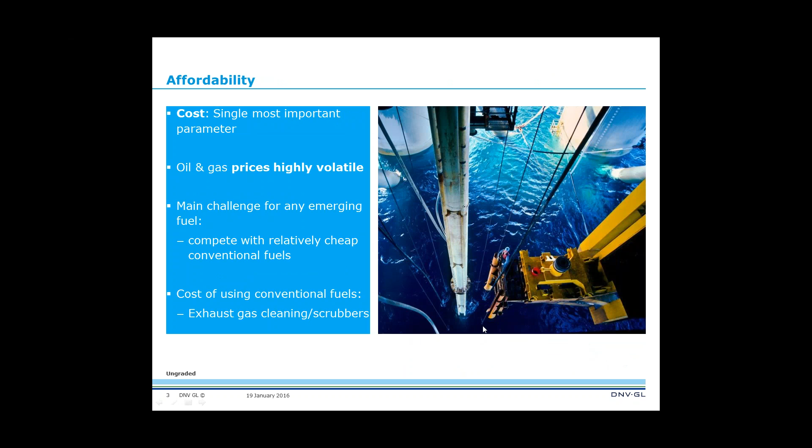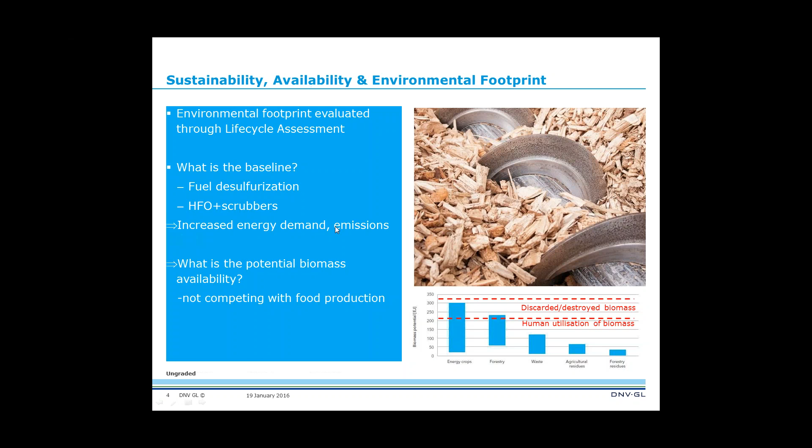We have an unwanted event, an event you want to avoid, and you have threats that could lead to that event. We need to develop barrier functions so that this event does not happen. And on the other side, if that happens, we need to develop barrier functions to make sure we avoid the consequences.

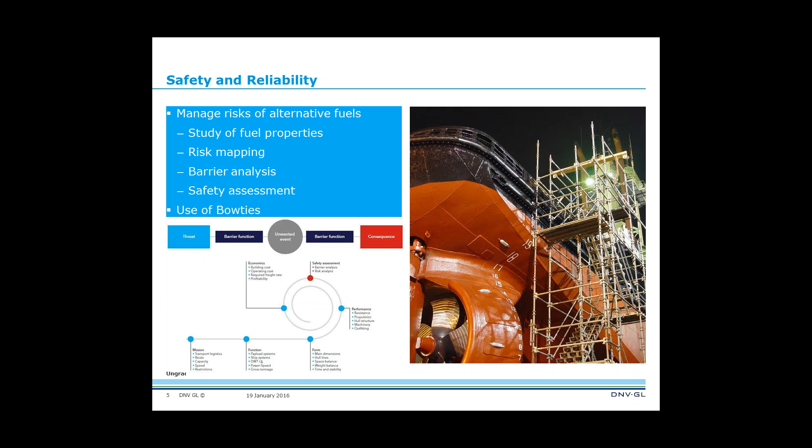So now I'm going to very quickly talk to you about some case studies.

In this publication we looked at LNG, shore-based electricity, a number of biofuels—not the most common ones, we just used methanol and pyrolysis oil as examples—and we looked at hydrogen. Because we have very short time, I will just talk about LNG and shore-based electricity, and give you some general comments on the rest.

LNG is a fuel that has started developing quite well lately. We had the right conditions for that: it began in Norway with cost incentives through the Norwegian NOx fund, and it was also a very good technical solution for addressing NOx and SOx restrictions in emission control areas. We also had the fact that in North America we had very cheap gas due to shale gas technology. So it's a combination of factors that helped LNG reach a stage where it can grow now.

There are still some issues related especially to the greenhouse gas, or global warming potential, of the fuel. We could have some methane leakage during production, but also from the engines, and this is something we need to understand well and address.

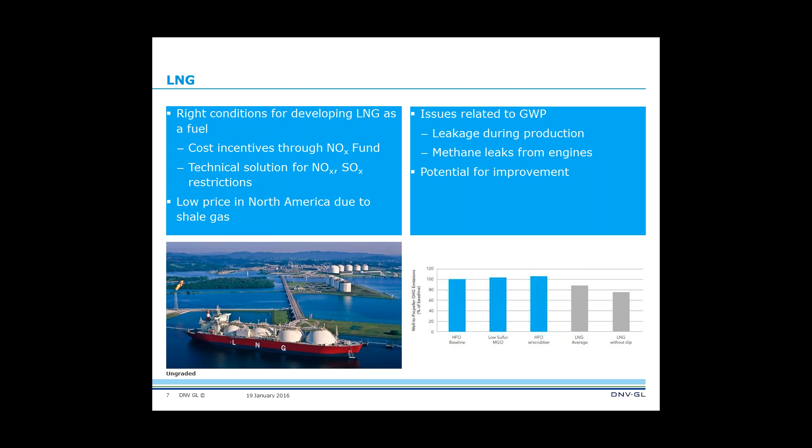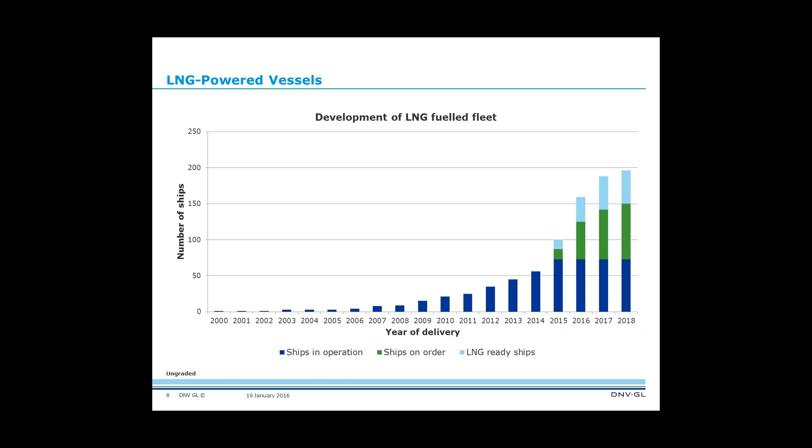And of course SOx emissions go to zero, and NOx can also be reduced quite a bit depending on engine technology. I want to show you a graph showing the development of the LNG fleet. These are confirmed orders, so you can see significant growth in the last few years, and we think this is going to continue.

I want to say a few words about electricity, because we're going to see it as a form of propulsion for some ships, for some small ships. In Norway we have a small ferry running on batteries now, but we're also going to see cold ironing used in ports more and more.

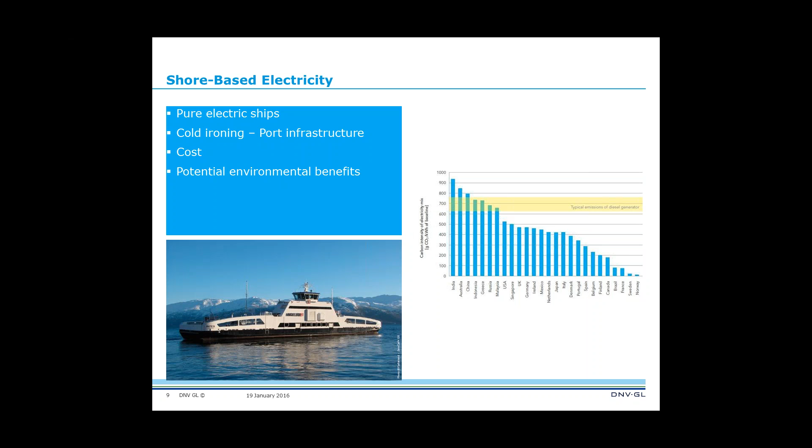Of course, you can think about the emissions for producing electricity in different countries—this is what the graph on the right is showing, and what the cost of that is. So we need to make sure this is an attractive option for vessels. And of course, we can also see batteries on board ships in the form of hybrid propulsion systems. DNV GL has battery rules, so batteries can safely be used on board vessels.

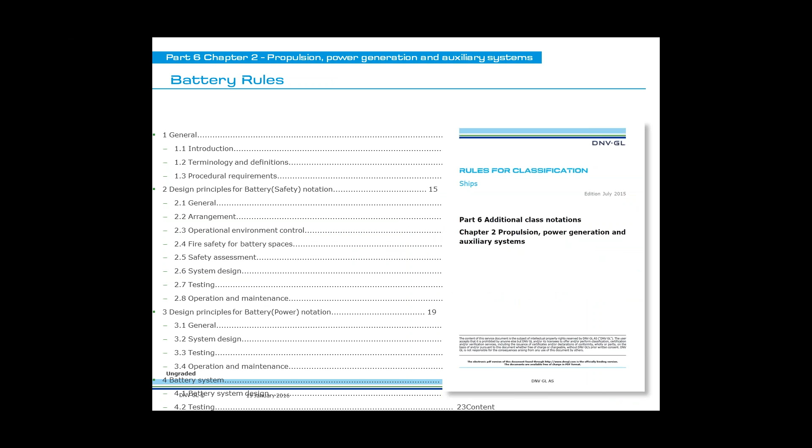As I said in the position paper, we looked at a number of other alternatives—a couple of biofuels—and we looked at their environmental footprint and their cost, and did the same for hydrogen. In general, all these options' environmental performance depends very much on how you produce the fuel, what kind of energy you use, what feedstock, what processes. So biofuels can reduce greenhouse gas emissions quite a bit if produced in a good way, or just marginally if not. There's a wide range of fuels there.

But the main barriers right now are the cost of the fuels, and especially for hydrogen, it's safety issues that also translate into cost later.

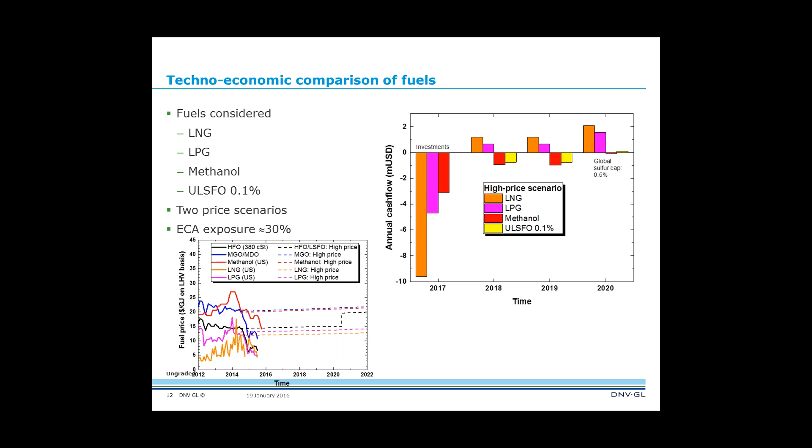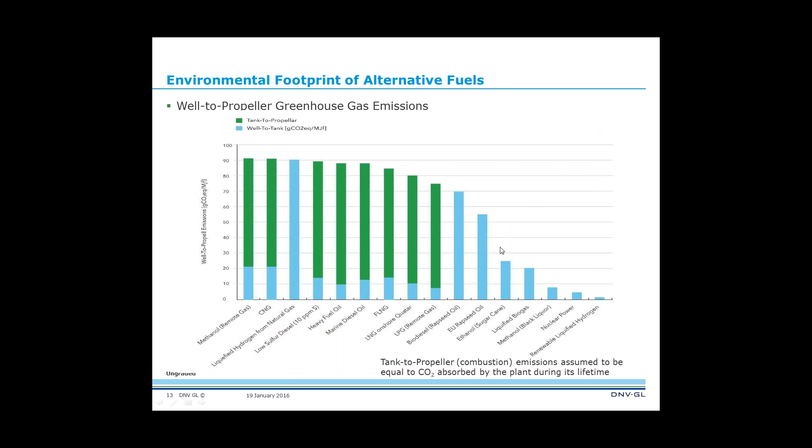As I said, we need to look at the environmental footprint of different fuels. This is an example from a previous study we did, published two years ago, looking at life cycle greenhouse gas emissions. Blue shows the contribution of the production phase of the fuel, and green the utilization phase. Here you have conventional fuels, and on the right side some biofuels, and you see that depending on how you produce your biofuel, you can have a very wide range of emissions. So this is very important to keep in mind.

So in order for any alternative fuel to compete with conventional fuels, we really need to increase the production capacity and make sure these fuels will be available where they're needed. For this reason, we think alternative fuels will first be used locally for local shipping, where small volumes are required and where there is security of supply. Once a new technology is proven, it might be used in other geographical areas, and this is what is happening with LNG now. It started in Norway, now it's moving to North America, and we think it might become a global fuel in a few years.

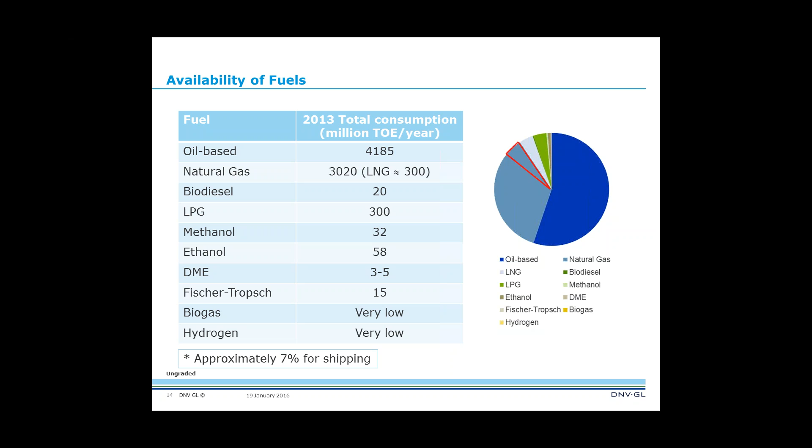So availability is very, very important. To conclude, it's very hard to say what is going to be the fuel of the future. It's a very complex decision, case-by-case, based on the ship type and operating profile, on the emissions regulations in the geographical area where the ship is operating, and in the future things like climate change concerns will become more important. Of course, fuel availability and cost will always be very important parameters. So I would like to thank you, and I will be very happy to take any questions later or after the webinar. Thank you very much.

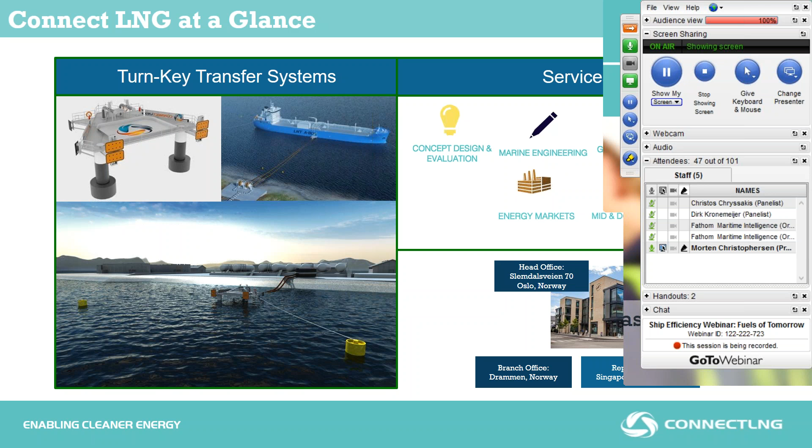Our company was founded on a belief that cleaner and cheaper energy should be accessible for everyone. We truly believe that more use of natural gas as a primary source of energy is a sustainable way towards a cleaner future, and throughout my presentation I will share with you how we are contributing to making this transition possible.

So why LNG? For the past 30 years, the world has seen continuous growth of trading natural gas in its liquid form as LNG. LNG has primarily been used as a method of transporting natural gas in larger quantities between continents. But as we've seen lately, LNG is being used as a product for other industries, such as fuel for the transport sector or feedstock in production, and for power generation in remote areas not connected to the gas grid, like for instance in Scandinavia.

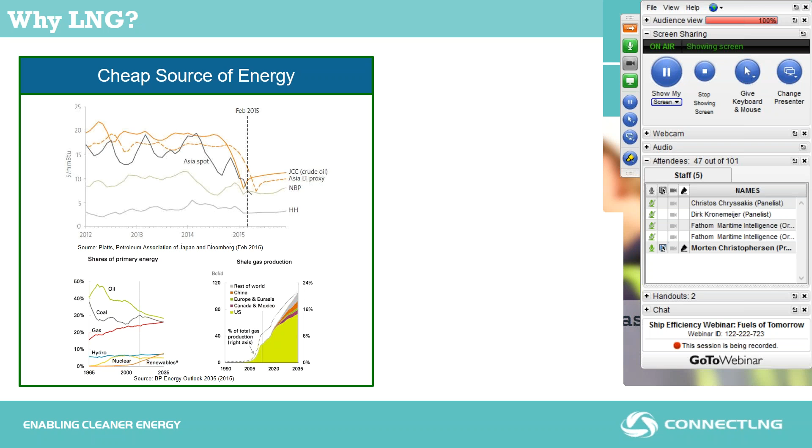Both end users and governments around the globe are moving their attention towards LNG as a source of energy, not only for transportation. The main reason is, first of all, LNG is a relatively cheap source of energy. Second, there are huge environmental benefits by converting from heavy fuel oil and diesel to LNG. For instance, one typical small-scale LNG terminal represents almost the yearly CO2 reduction from 32,000 cars. And to get the same level of CO2 reduction, one would need to build 130 soccer fields of solar panels. Not to mention the NOx, sulfur, and particle emissions we also reduce by converting to LNG.

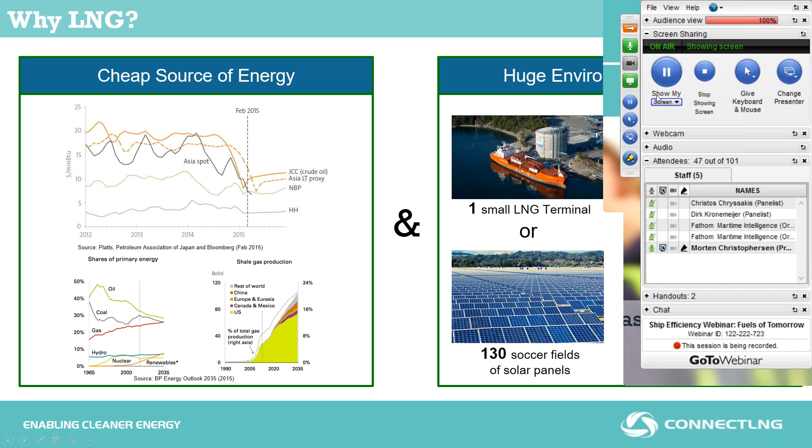So, Morten, excuse me, sorry. It's Catherine. Might you be able to just minimize your webinar screen tool, just because it's blocking part of your presentation? Oh really? Yes, okay, how do I do that? Like this? Perfect, thank you so much. Thank you.

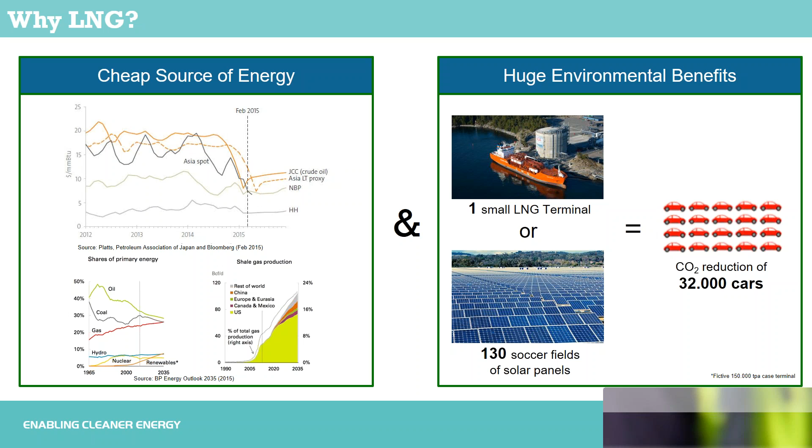So yeah, clearly there is a cost incentive for end users to switch to natural gas, and in addition to the environmental benefits, this is exactly why governments around the globe are keen on pushing this forward. And the result has been considerable worldwide investments in LNG in the past years, and it's projected there will be strong demand also in the long term.

Even in the short run, and despite the low oil prices, LNG trading and infrastructure is actually considered as one of the few bright spots in the oil and gas and shipping markets by traders and experts. The order book for vessels running on LNG as fuel has also increased, and the fleet will almost double in just a few years. But this market will, in the short run, primarily be driven by IMO regulations and the governmental push, and ship owners taking a strategic approach until oil prices pick up.

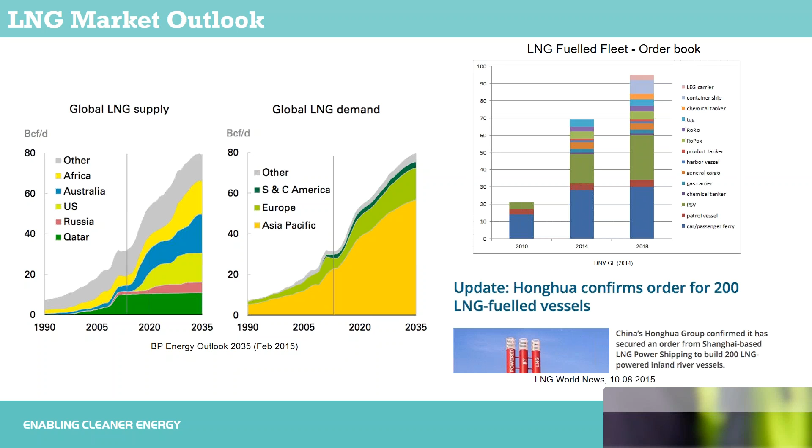So the main increase in LNG trading is mainly driven by the need for supplying natural gas grids and for power generation, primarily in Asian countries. And this will probably be the main role of LNG in the future as well. However, the large potential lies in downstream distribution of natural gas.

China is planning to double its domestic gas consumption in the energy mix in the next years. The EU is incentivizing the shipping industry to convert to LNG as fuel. And we see more and more export licenses being issued for export of US shale gas, making end users, especially in Latin American countries and the Caribbean, turn their attention towards LNG.

However, the main bottleneck for the industry, as we see it, is that the infrastructure for downstream distribution and use of LNG is not yet in place. We are actually approached nearly every week by clients all around the globe who are looking for good solutions to their infrastructure challenges. And now I want to briefly explain what they are telling us.

So let's take a look at the value chain. On the top here, you see the traditional large-scale value chain, which is well established all around the globe. And on the bottom, you see the mid to downstream distribution of LNG to end users, the more regional distribution in smaller scale.

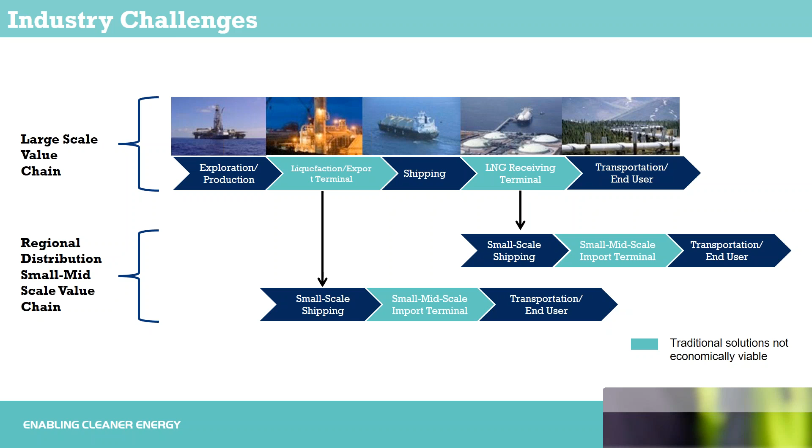And on the end user side, clients are telling us that even though they want to convert to natural gas due to the low energy prices, the small volumes don't justify the infrastructure investments which are needed. The main reason for this is that the LNG terminal capex doesn't scale very well with the size of the terminal. On the left side here, you see the cost components of a typical large-scale terminal.

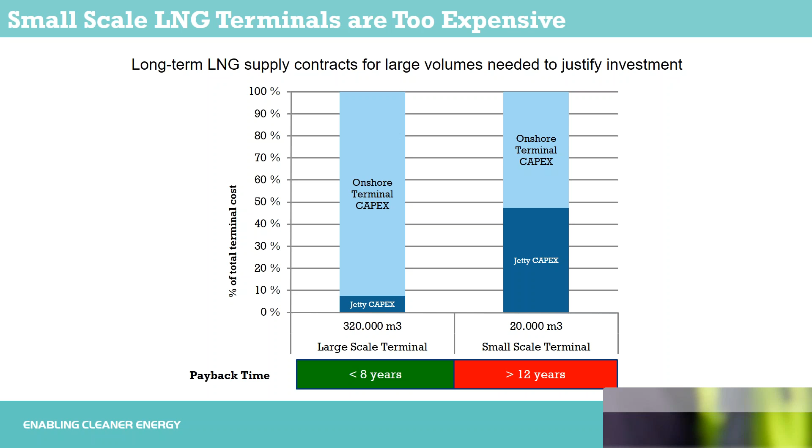And on the right side, the cost for a typical small-scale terminal. What we see is that the jetty capex, in many cases, represents almost half of the total terminal costs for a small-scale terminal, which in turn makes the payback time too long to justify the investments. So even though the terminal is smaller, one still needs a pretty large jetty or to dredge large areas of the seabed, which is very costly and time-consuming. In addition, it is often difficult to get approvals to build and dredge on the shoreline.

And what we are doing at Connect LNG is removing the need of building jetties and dredging the seabed to reduce one of the largest cost drivers in LNG terminals. And now I'm briefly going to show you how we do this.

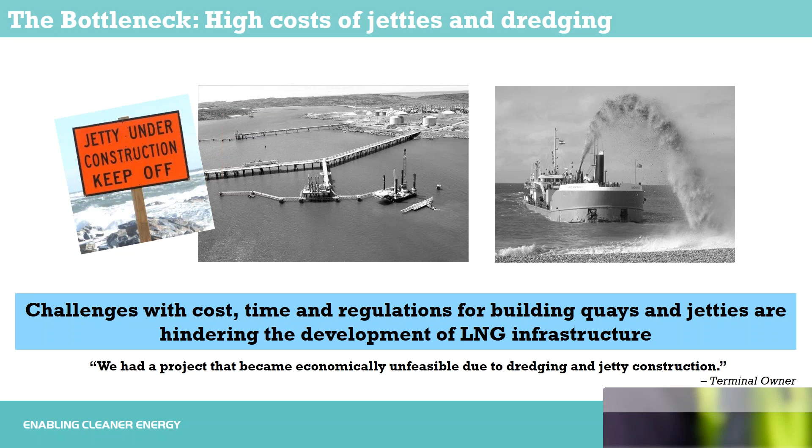I'm going to show you a short video. Unfortunately my audio doesn't work today, but you will also find the video on our web page, connectlng.com.

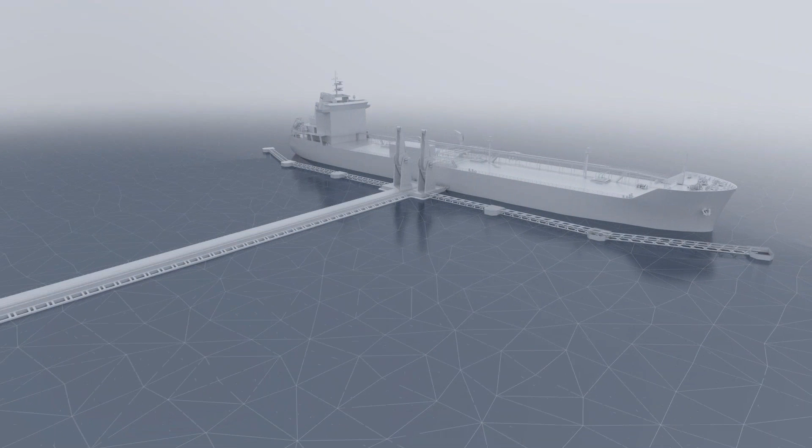So this shows the traditional solutions to build jetties, and often in combination with dredging.

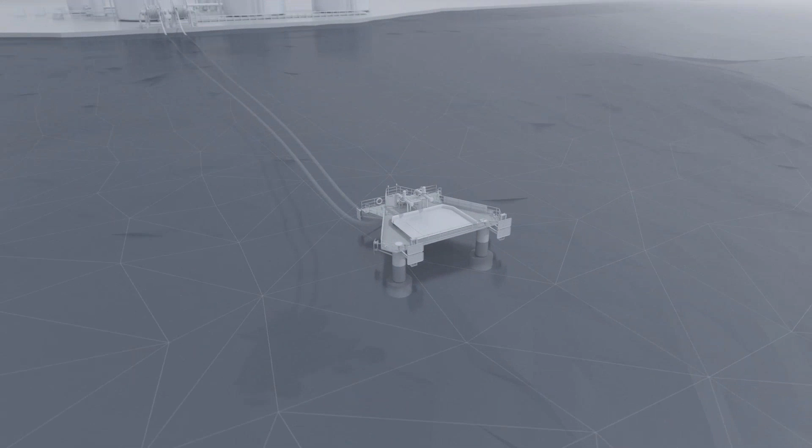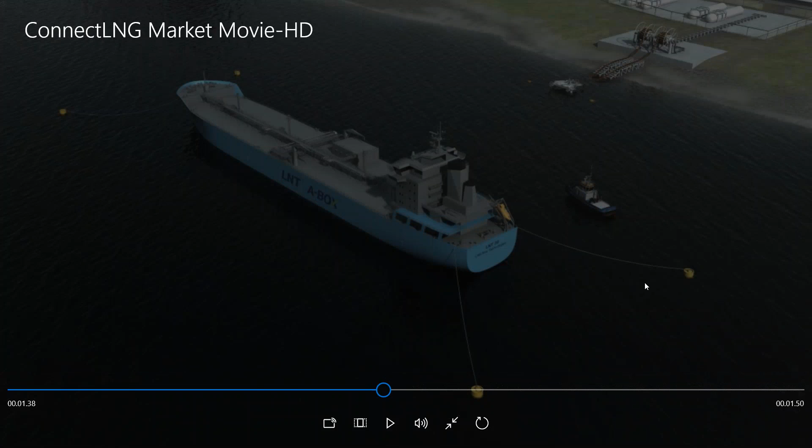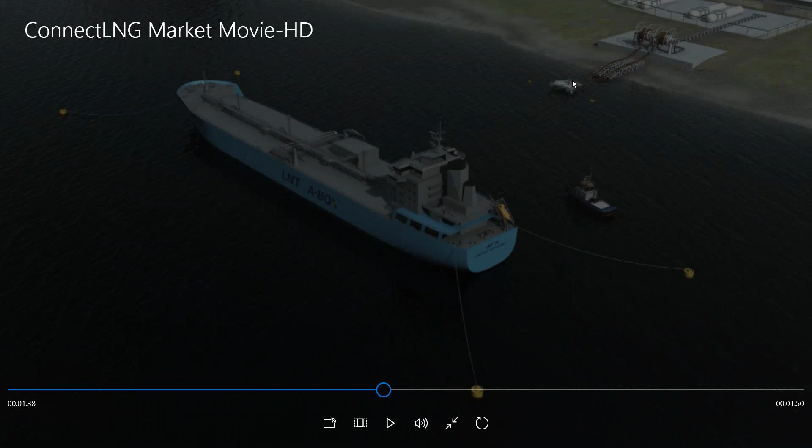So this is our transfer system. It's essentially a floating jetty. We use a mooring system to moor the vessel, a traditional multi-buoy mooring system. As you see here, the transfer system or platform is stationed close to shore when it's not in use, and we use a tug to push the platform towards the vessel. All right, so that was just a sneak peek to our system.

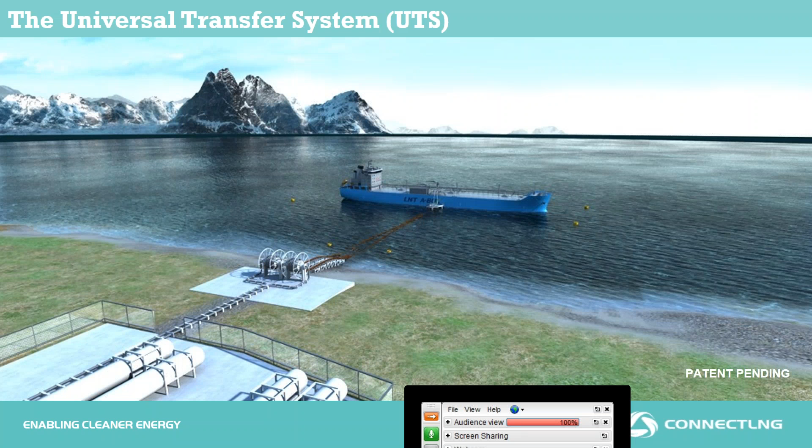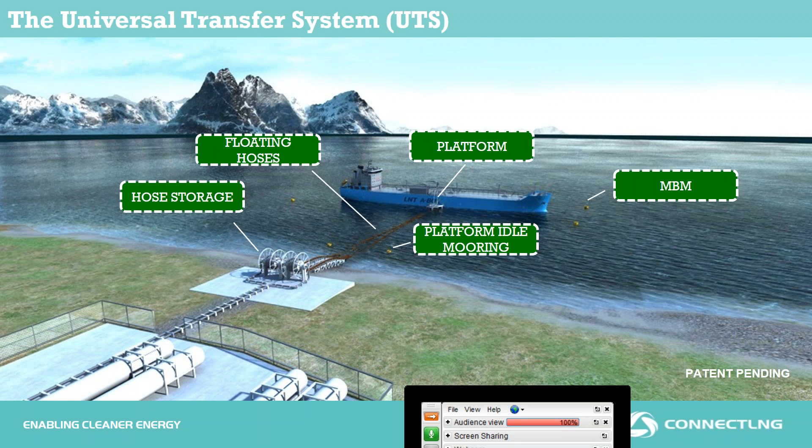So the UTS consists of a traditional multi-buoy mooring system to station keep the vessel. It consists of a unique platform connection unit, which is capable of connecting to a wide range of different vessels without any need for modifications. It consists of cryogenic floating hoses designed for offshore use in very harsh environments, and also idle mooring and hose storage to be able to remove the system from the harbor basin in between transfer operations. We are providing a turnkey system consisting of traditional proven technologies.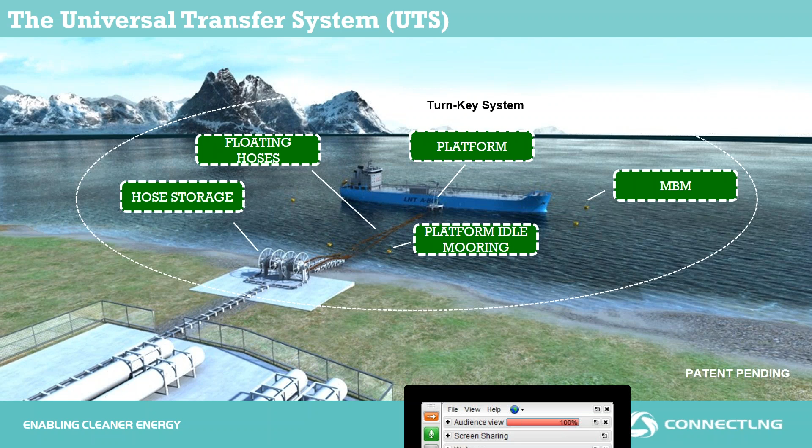Efficient and safe marine operations are very crucial for ship owners. Therefore, we have based the whole operation on traditional harbor operation as it is done in harbors today. We are taking great pride in providing a safe and easy handling. Therefore, the whole operation is developed in close collaboration with the terminal operators. And I must say that it has been very important to have the people who are actually performing the operation on board early in the design phase to include their viewpoints in the design and to be able to provide an efficient and safe operation for the terminal crew.

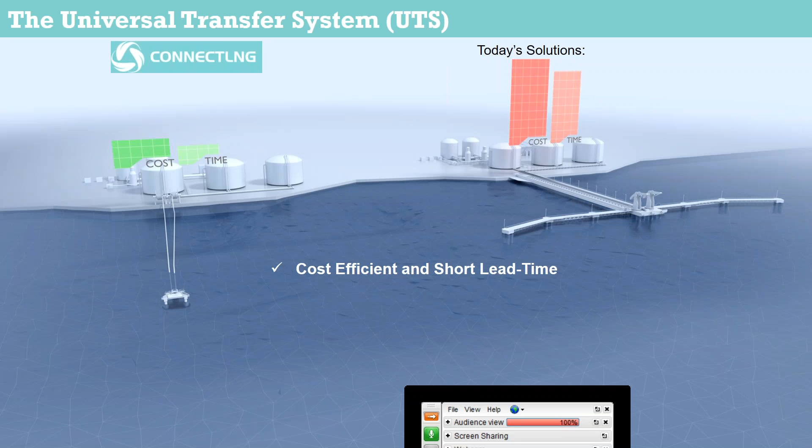So our patent pending system significantly reduces the terminal capex and it can be deployed quickly. It is flexible and scalable to be able to take into account an uncertain future with minimal future terminal modifications required. The system is universal, which means that it's able to connect to any vessel without any ship modification needed.

Since it's floating, we reduce the intervention with the surrounding marine environment, which therefore reduces the regulatory hurdles, which often is difficult when you want to construct huge structures in the shoreline.

It's able to be relocated or resold later if the market should change over time, or implemented as an intermediate transfer solution. And last but not least, the system decreases the collision risk, which ship captains are often concerned about when berthing in harsh weather. And it provides an immediate disconnection and separation between the terminal and the vessel in case of an emergency.

Currently, we have more than 24 specific projects in our pipeline for the system, ranging from reloading projects, small-scale import for power generation, and even some for bunkering as well.

We have already successfully delivered a basic design for a large European LNG terminal owner. This customer is primarily importing large quantities of LNG today, but they wanted to expand their business into supplying new downstream markets. Our challenge in this project was how could we utilize as much of their existing infrastructure as possible to reduce the investment cost without interrupting their ordinary operations.

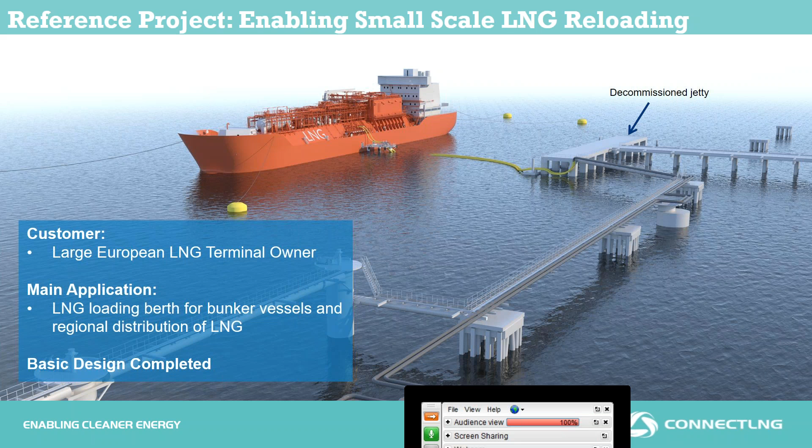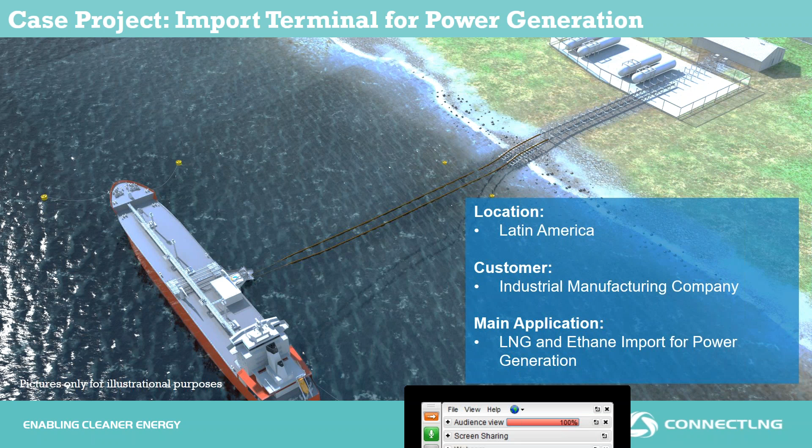Another example, we have also been approached by another customer in Latin America. In addition to reduced investment costs, in this case they wanted a system which could provide flexibility. Due to the current low prices for ethane, they wanted the flexibility of both handling handy-sized ethane carriers for import from the US, as well as being able to import LNG in the future. So therefore we designed a system which is capable of handling both ethane and methane, as well as different kinds of vessels to give them flexibility in the value chain.

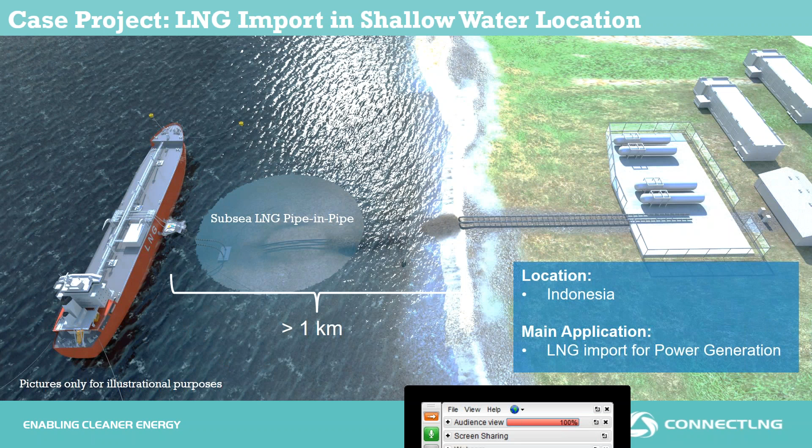We are also working on several projects in quite extremely shallow waters, which is actually often the case around the globe. For these projects, we look at how we may conduct cryogenic transfer for kilometers through either a subsea pipeline or alternatively to construct a simpler trestle structure for parts of the distance.

We have also worked with port authorities looking at how we may enable LNG bunkering in ports. For ship owners, it is important to perform the bunkering concurrent with cargo operations to reduce the time in port. Often bunkering from the seaside is the only option, since the safety zones for quayside bunkering often take up a lot of the quay space.

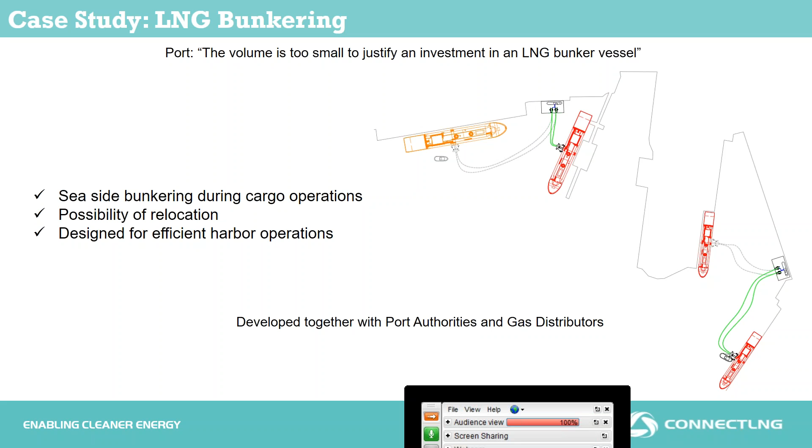Ideally, you could use an LNG bunker vessel, which is a flexible and good solution for this. However, we have seen that the LNG bunker volume is in many cases too small to justify investment in an LNG bunker vessel. And when talking about cruise ferries or large cargo vessels, the volume is often too large for bunkering from trucks. So through our transfer system, we have developed an alternative solution for this.

So just to summarize, the LNG market is growing rapidly, especially on the downstream side. However, the growth is being challenged by high infrastructure costs. There are challenging times for the maritime industry, which promotes the need for cost-efficient solutions. So what I want to say is let's work together towards a sustainable and clean future for the maritime industry. Thank you so much.

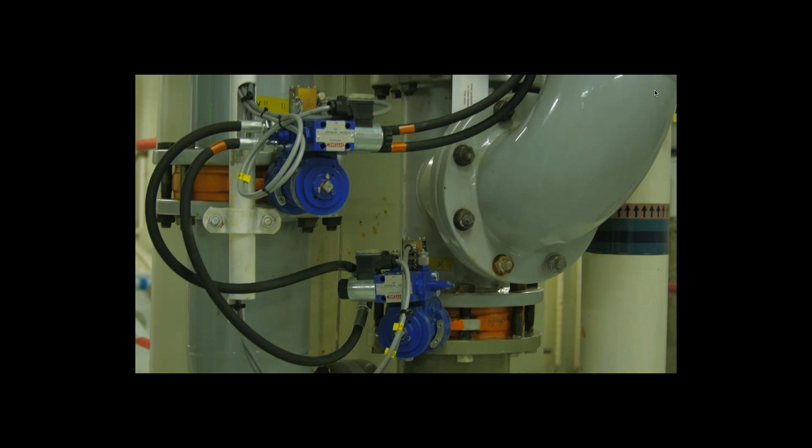We recently bunkered Willem van Oranje with the first load of biofuel, and that was reasonably successful. It's still a pilot because we have to prove that it's workable, scalable and sustainable. We started with a B30 blend on board of this vessel. It gives us the hope and the trust that we can scale it up to B50 in the near future.

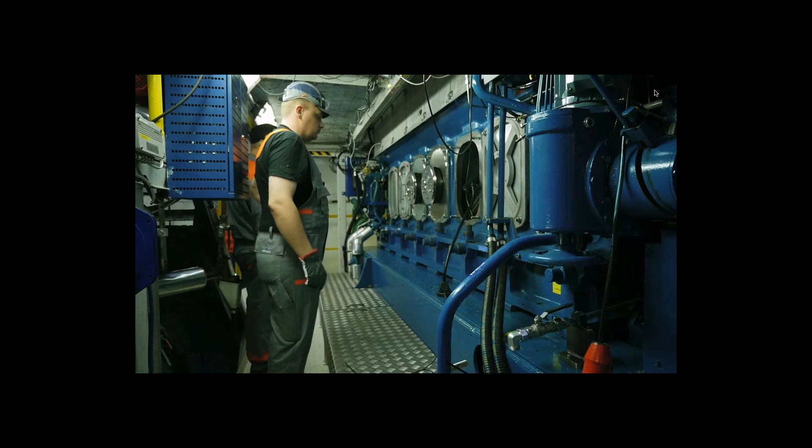We have a lot of experience running on biofuel, also much more challenging biofuels. So our very short expectation is simply to prove that these fuels work. Innovation is the key issue, and that's what has driven our company at the moment. We contribute to a more sustainable environment, and that's one of our goals in the future, to establish projects in a more environmentally friendly way.

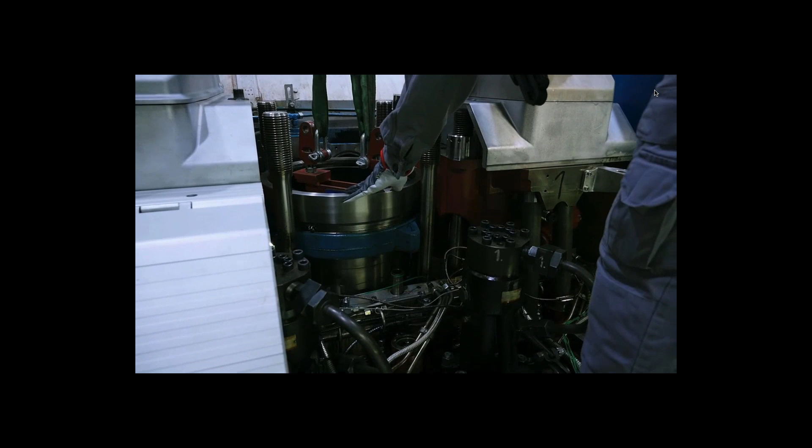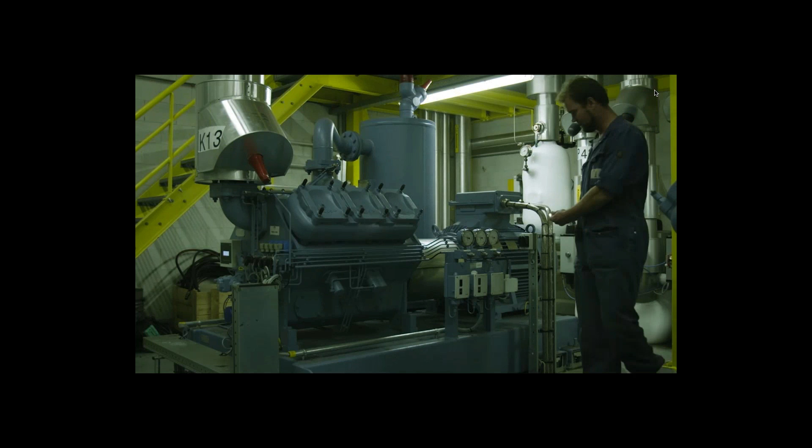So what are we testing at this moment? We are testing 3 different biofuels of 3 different grades. One is, shall we say, more easy, more light fuel oil-like, and the other two are becoming slightly more challenging. This project is not only for Boskalis, it's a project for the maritime industry in a global way. And at the end, if we can use a waste product and turn it into a new source of energy, I think that will be the success of the biofuel.

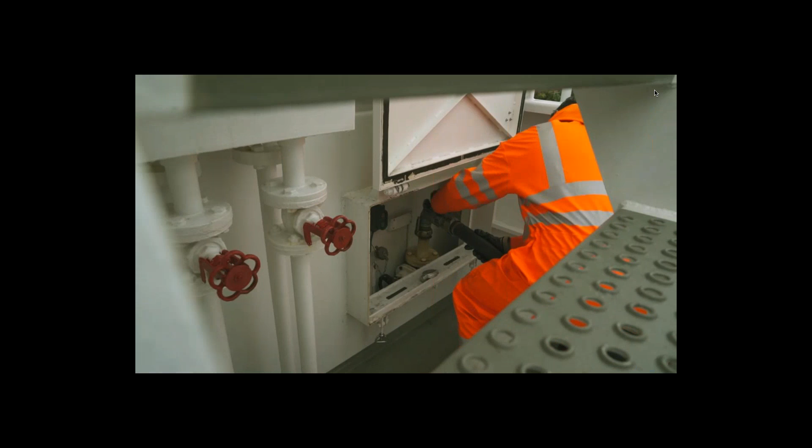This second generation HVO, yeah, it's scary, but according to the contracts, it only has advantages. I can name all the advantages, but you can do your homework and read it. They claim a 50 to 90% CO2 reduction. Why now? Because the possibilities are there and the technology is available, so why not? We need more sustainable energy, and that is something that can become a customer demand.

At GoodFuels, we recognize it's very hard to make real sustainable biofuels. As a solution, we have implemented an independent sustainability committee to make sure we're always working according to the latest and most strict sustainability criteria. The sustainability committee has to approve of the sustainability aspects of all the products we sell or develop.

GoodFuels has a wonderful corporate goal to help the marine shipping industry convert from using some of the most polluting transportation fuels to sustainable marine biofuel. We can only succeed when it's truly sustainable.

And we would like to have a global standard for that, such as the Roundtable on Sustainable Biomaterials Standard. But that's not presently yet there. And that's why it's important that this initiative has installed a sustainability board to look critically at all these new processes, products and technologies to see whether really all aspects of sustainability are taken on board.

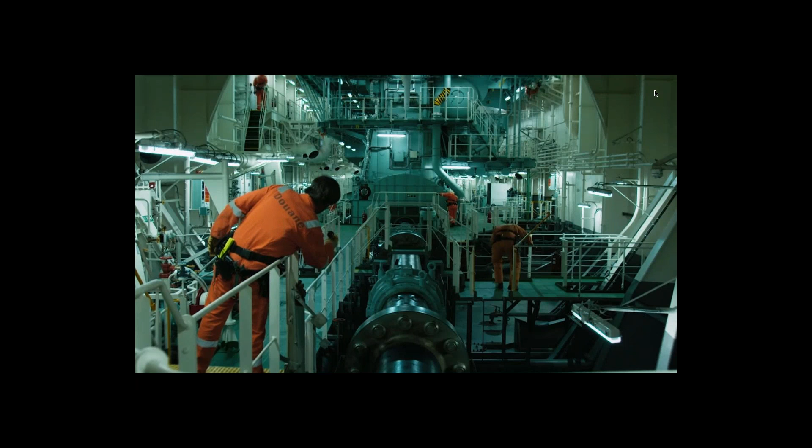In the handling of cargo, the percentage of biofuels will grow. That can be scaled up enormously, and if it's, let's say, up to 10% of the existing fuel handlings we do right now, then you're speaking about 4 million tons for the Port of Amsterdam.

In 2030, our bets are that 5% of the total marine fuel consumption is going to be marine biofuel. Bio-based economy provides a tremendous opportunity for the Netherlands in terms of greenification of our mostly fossil-based economy.

Aviation as well as marine are sectors that cannot do without liquid biofuels. Our vision is to go to full-scale biorefineries to produce lignin and sugars. We think marine biofuels made from lignin are complementary to the chemicals made for the chemical industry.

Steeper Energy sees the heavy transport sector, including marine propulsion, as the best opportunity for advanced biofuels. Our proven hydrofaction process converts biomass to renewable fuel oil. With minimal upgrading, hydrofaction oil can be used directly as marine distillate. We are working with global leaders like GoodFuels to produce large volumes of renewable marine fuel.

Of course, they want to have economic success, but the real thing is to move to a slightly better, more cleaner world, and this is where we are going for.

Okay, so I think this film gives a pretty good overview of what we're trying to achieve with GoodFuels. Quick history of the company.

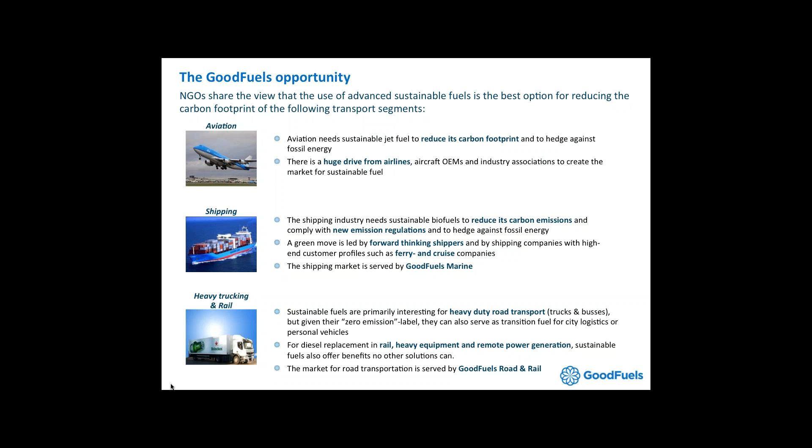What we have done in order to make this sort of industry is, just like we've done on the jet side, we have a supply chain whereby we very much focus, first of all, on the feedstocks.

The feedstocks determine the price, but also the sustainability. Via our refining partners, we make our own blends in various qualities and resources, and via logistics partners, we ship it to our end client.

We are active in those geographies in the world where there is the strongest urge to use this type of fuel, and that's very similar to the hotspots on the jet fuel side: West Coast US, Europe - particularly Western Europe, the Nordics - and Australia. But you also see, for instance, next week we are in Singapore. It's getting more and more attention for this type of stuff. But obviously, at this moment in time, we also need the local incentives available in these geographies to compete head-on with fossil fuel.

Sustainability, as Christos already mentioned, is of crucial importance. There's no point making, in our view, a biofuel that's supposed to fight climate change if it's destroying the rainforest at the same time or competing with food. This is why we've set up a very strict sustainability procedure, making sure all our fuels meet the highest standards. We are a member of both ISCC and RSB - RSB being a standard set up by NGOs, which is very strict on sustainability. But next to that, we have our own so-called sustainability board, whereby a number of NGOs advise on all the fuels we sell, to make sure they are truly sustainable.

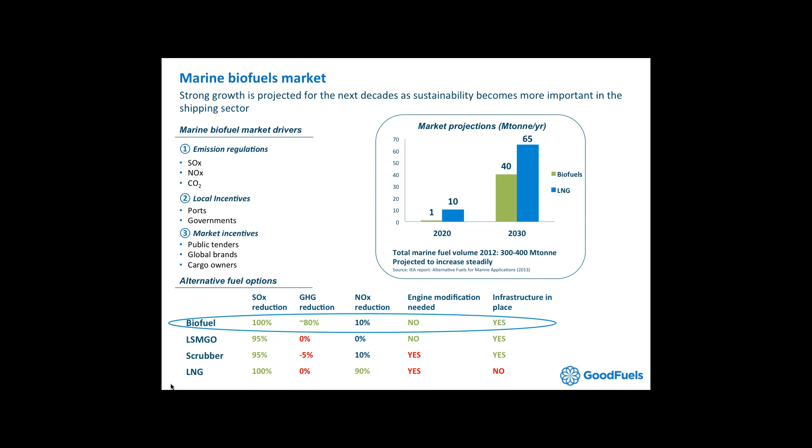Together with Boskalis and Wärtsilä, we have set up a longer-term program to test various biofuels into the system. If we can demonstrate it works well, we also try to get them certified at CIMAC and IMO level. But so far we already have a couple of fuels in the market that are commercially available and have met all the standards put forward by a number of leading OEMs. This is where we are also getting more clients.

You saw in the film, for instance, coast guards, ferry companies, dredging—particularly everything short sea at the moment is our prime target, and this is where we want to grow the marine biofuel footprint. So with this, I wanted to quickly introduce our company to you and show you what's happening on the marine biofuel side, and I'm very much looking forward to any feedback or questions you may have.

Thank you, Dirk. That was extremely interesting, and it's such a great initiative and program for the industry. It was very interesting to hear what you've brought from the aviation biofuel side and how that can be applied into the maritime industry.